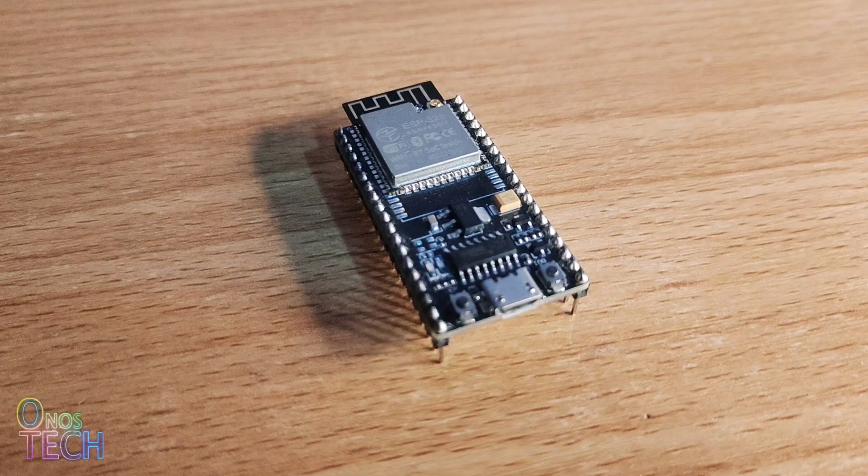Hi everyone. Do you know that the ESP32 has an inbuilt real-time clock? Today's video will show you how to read the values of the RTC and display them on an I2C LCD. We will also see how to read the values of the DS3231 RTC module.

Create a project in FLProg with the ESP32 controller. From the real-time clock tree, drag the block to obtain the data from the real-time clock into the program. Double-click on the block and click on the new clock number.

The displayed prompt requires you to select either from the DS1302, DS1307, DS3231, and the controller's internal clock. Select the controller's internal clock.

We will first display the time on the LCD. Select outputs for hours, minutes, and seconds, then click OK. The time values are required to be converted to strings for display on the LCD.

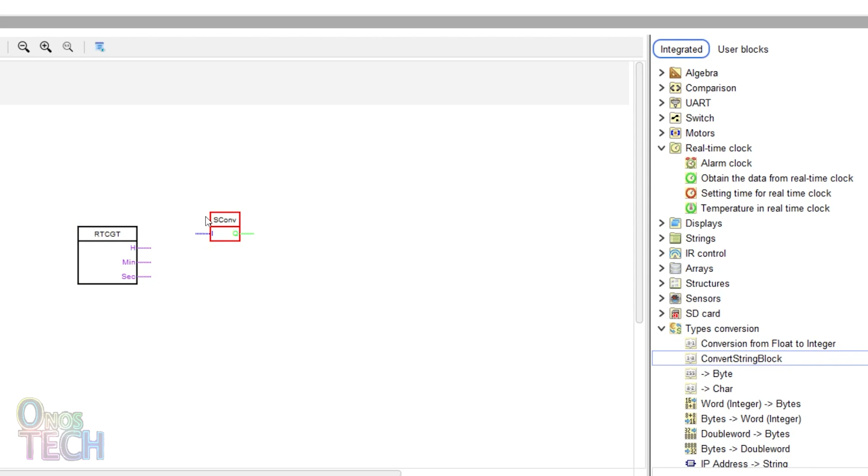Drag a convert string block into the program and place it here. Double-click on it and select Time. Copy the converter string block and paste it twice. Arrange them before the hour, minute, and second outputs of the RTC block. Then draw the respective connections.

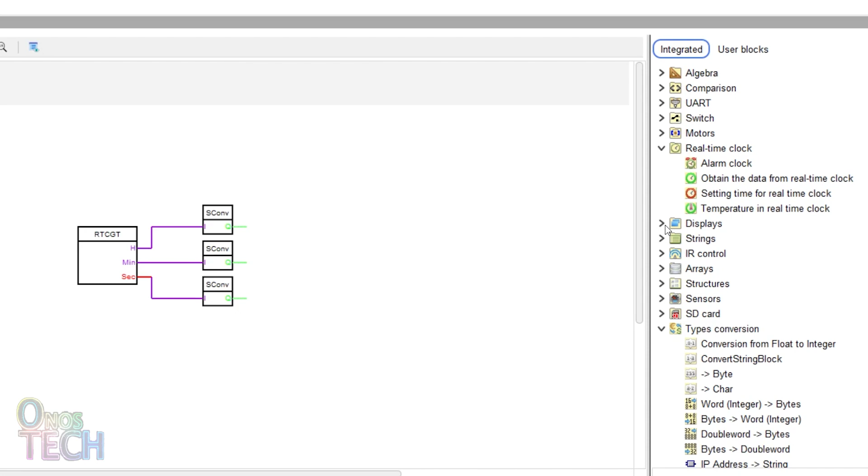Drag an LCD block into the program and double-click on it. Click on New to add the display and select Connection via I2C. I am using the 2x16 LCD.

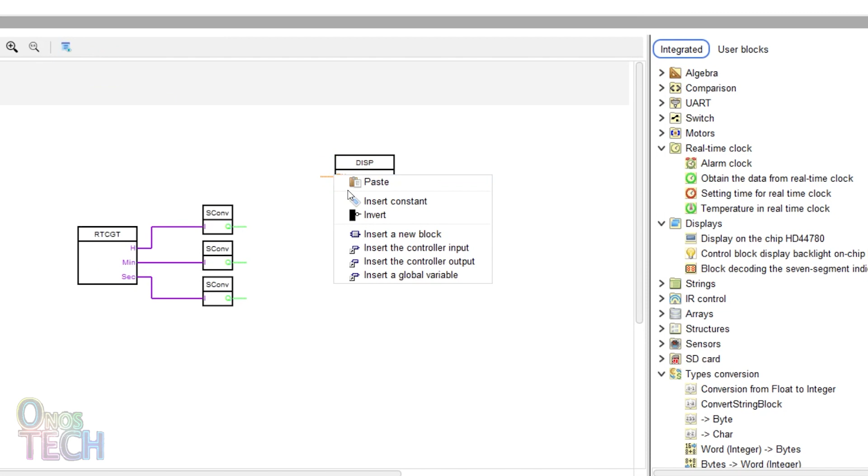Click OK and invert the EN input. Copy and paste the display block. Double-click on it and select Data Input. Deselect to center. Change the row to 2, the column to 5, and click OK. Draw the hour converter string block output to the display input.

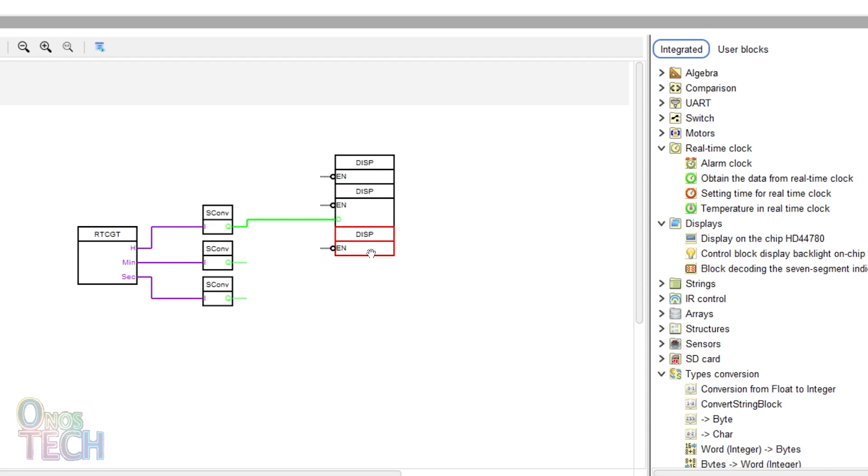Copy and paste the first display. Double-click on it and input a data constant of colon. Deselect to center. Change the row to 2, the column to 7, and click OK.

Copy and paste the second display. Double-click on it and change the row to 2, the column to 8, and click OK. Draw the minutes converter string block output to this display input.

Copy and paste the third display. Double-click on it and change the row to 2, the column to 10, and click OK.

Copy and paste the second display block. Double-click on it and change the row to 2, the column to 11, and click OK. Draw the second converter string block output to the display input.

When the code is uploaded into the ESP32, the time displayed on the LCD starts from 0 hour, minute, and second. Note that the time values will always reset to 0 when power is removed from the ESP32.

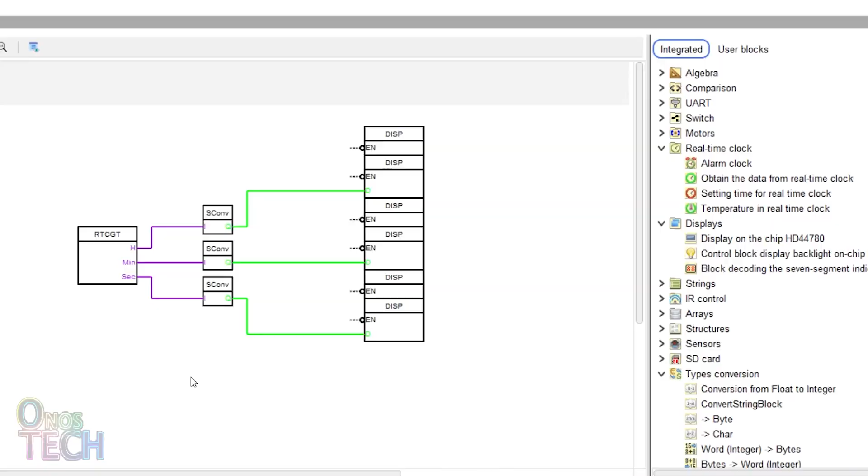Let's change from the internal RTC to the DS3231 module. Double-click on the RTC block and click on New. Select the DS3231 clock. Connect the module to the ESP32 with the same pin connection as the LCD.

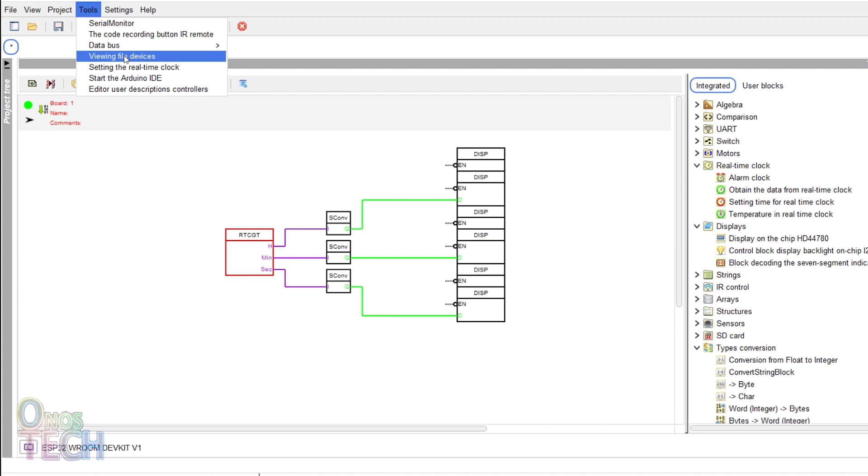To set the correct time and date on the module, select Setting the Real-Time Clock option from the Tools bar. Ensure that the ESP32 is plugged into your computer. Select the DS3231 from the prompt. Click on Upload the sketch from the next prompt using the correct board and port number settings.

When done uploading, exit and click on Next. This window shows your computer's date and time. Connect the ESP32 to display the DS3231 time and date.

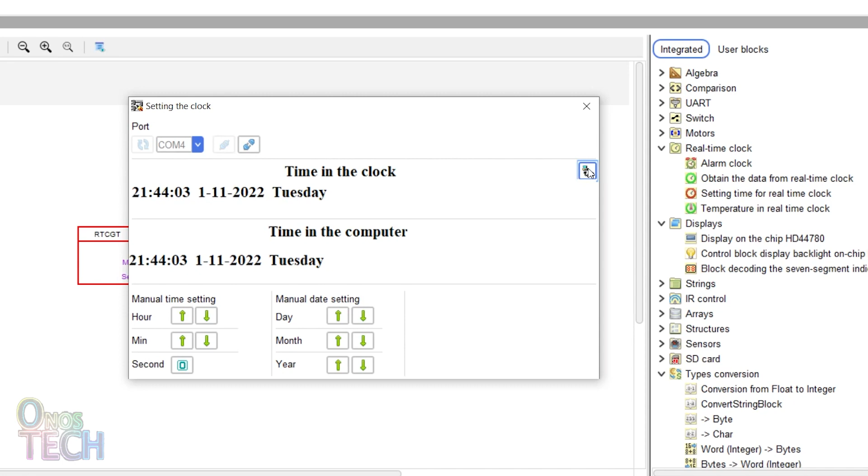Click on the icon at the top right to synchronize the module time with the system time. Exit and upload the program to the board. Observe that the correct time is now shown on the LCD.

Finally, let's display the time, date, and temperature of the module on the LCD. First, connect a push-button switch to pin D12 of the ESP32.

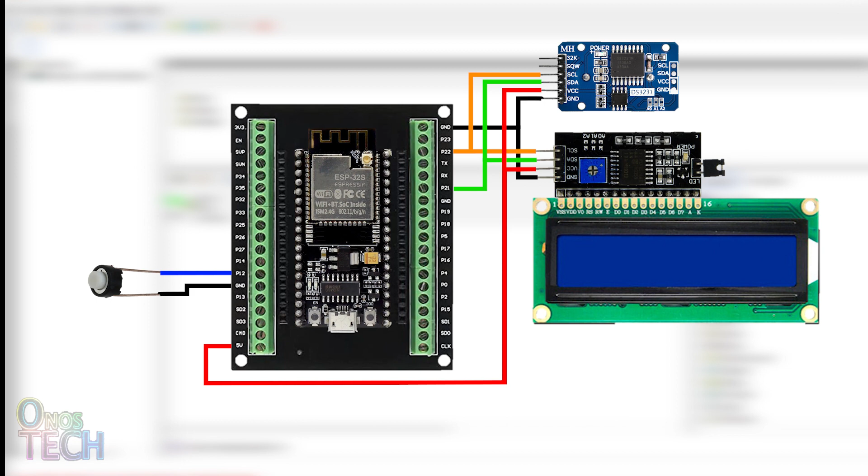In a new project, add a digital input tag named Menu with bounce protection and pull-up resistor enabled to pin D12.

Drag the digital input to the program and invert its output. Also, add an integer variable named count and drag it into the program. Place a counter between the menu and the count tags.

Enable when the upper limit is reached with a constant value of 3. And set the current value with a constant value of 0.

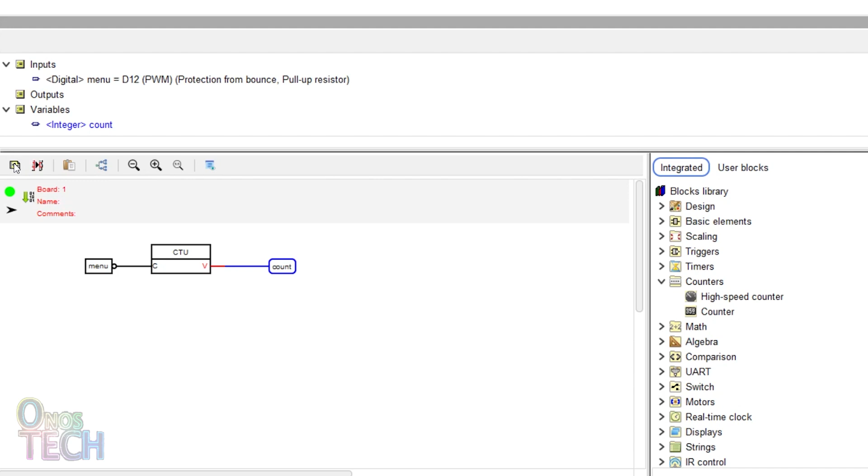Next, click on the new board icon to add a new program board. Repeat the earlier steps to add the LCD block to display the data constant of time. Copy and paste the block and select the input data to be displayed in row 2.

Insert the RTC block with the DS3231 selection. Select output time and date. The string format of the time and date to be displayed is explained in this help section.

Input lowercase letters h:i:s and uppercase letter A. Click OK and draw a connection from the block output to the second display input.

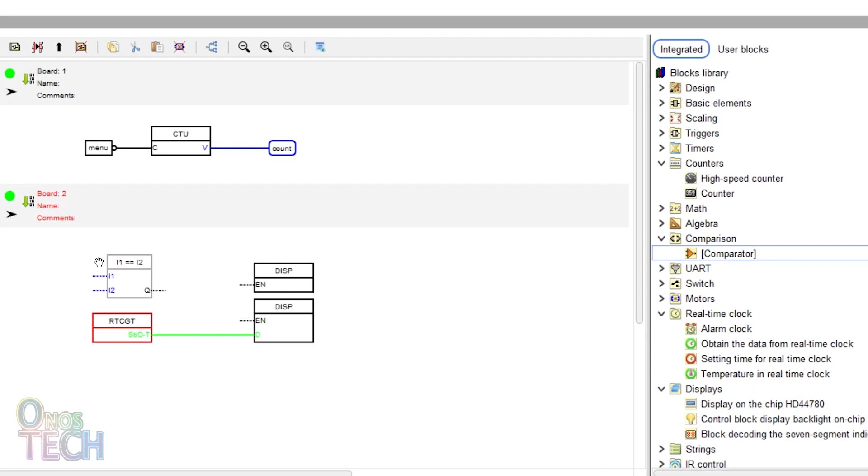Place a comparator block here with the default equal. Right-click on the second input and insert an integer constant of 0. Drag the count tag into the program. Draw a connection from its output to the first input of the comparator. Connect the comparator output to the EN inputs of the display blocks.

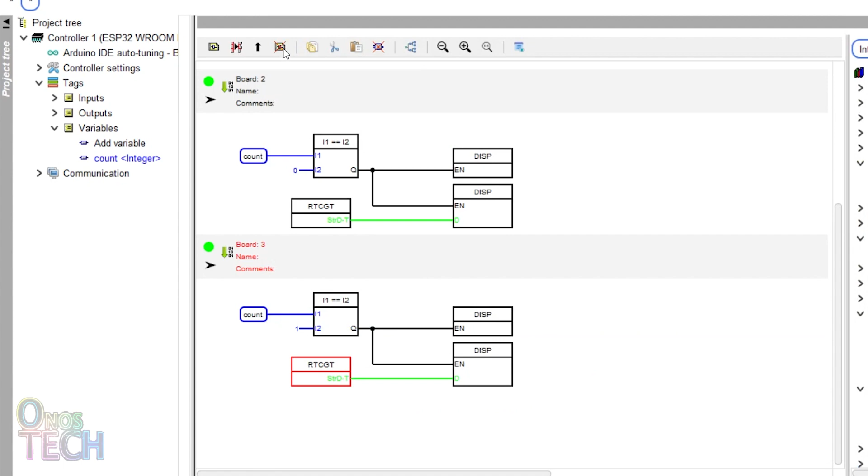Copy these blocks into another program board. Change the comparator second input constant to 1. Change the string format as shown. And the first display data constant to date.

Copy these blocks again into another program board. Change the comparator second input constant to 2. Replace the RTC date and time with that of the temperature. Place a ConvertStringBlock and connect them to the second display.

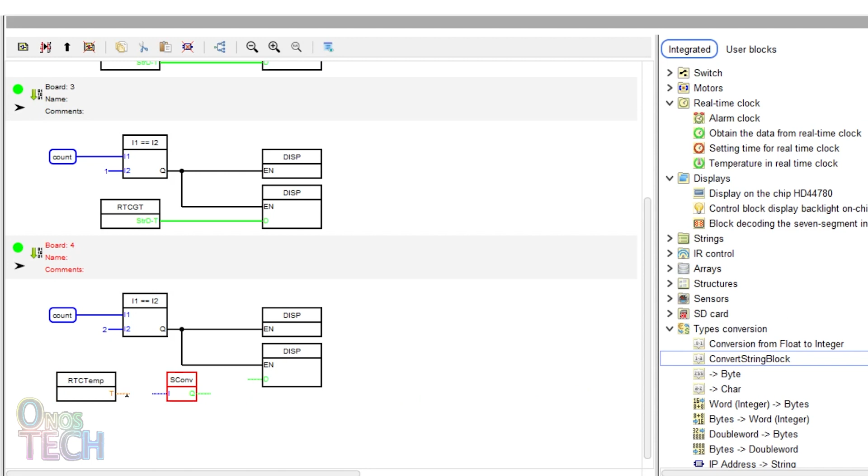Then upload the code to the ESP32. Observe that the correct time is shown on the LCD. Press the push button switch once to display the correct date. Press again to display the temperature, and again to return to the time.